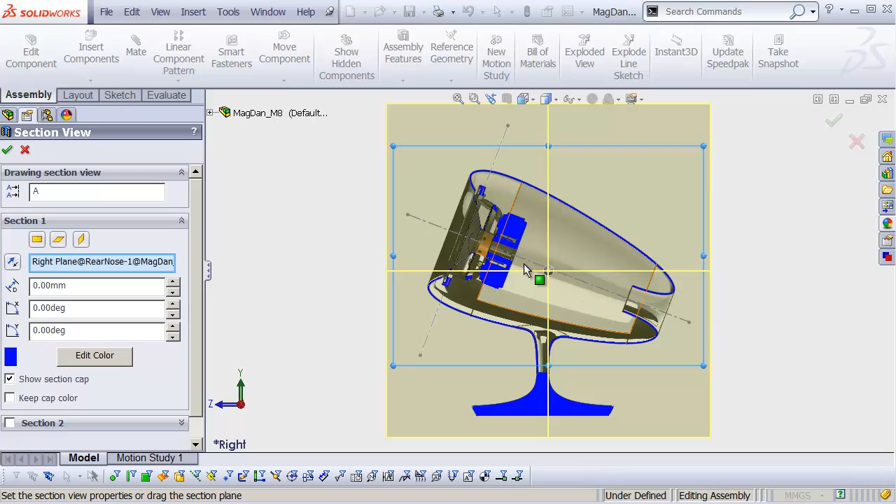Now, to do the inside of this port, first of all, it's going to be helpful to turn on a section view. A section view is effectively going to cut your model in half. It doesn't actually cut anything, it just visually cuts it in half so you can see the inside of the model as you're working, when in reality the part stays exactly as it was. It's still a full model.

Over here in the section properties, you can choose which plane you cut it on. In my case, I'm choosing the right plane. Hit OK. And now I can see what's going on inside this model, which is always embarrassing because then you can see how much we cheated, like making this a big solid chunk, and how this is hollow. How is that made? Nobody knows, we haven't figured that out yet.

But we can also see that there's this horn missing. And to build that, it could be a really repetitive process. We've done this a bunch of times now. And why would we go to the trouble every single time of creating a new part, importing the master model, all that stuff?

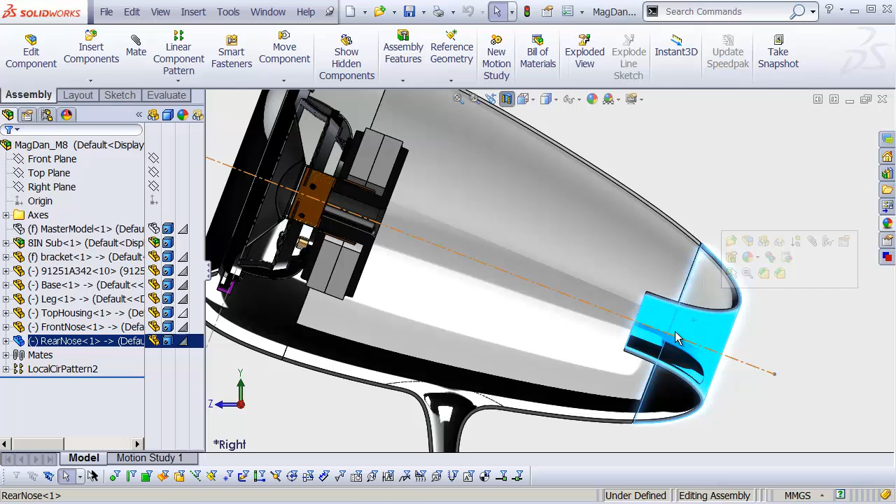Well, here's a quicker way. Now that I have this part that's almost exactly what I want, I'm going to open that in a new window, go to File, Save As. Now, this is a really important point. It's going to warn me, it's going to say, do I want to save as a new name or save as a copy?

If I save as a new name, when I save the copy, it's going to replace the existing part in the assembly with the new one. That's not what I want. I want to save as a copy so that this new piece is not in my assembly at all. Let's click Save as a Copy.

And just so you know, if you don't get that warning box, the other way to do it is right down here. If you check this box for Save as a Copy, that's the safest way to create a new part from an old one. So let's call this our port and hit Save.

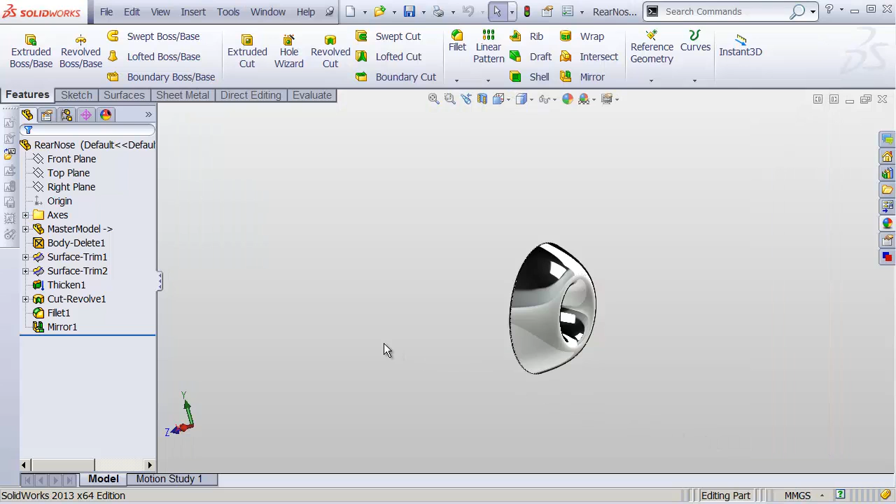Now notice we saved as a copy, so this file is still called rear nose. And if I close this up, we still have our rear nose file in there. All we have to do is go Insert Component, Browse. I'll find that port file that I created, Open. Don't click anywhere, just insert it straight in. And now we have the port in there. It just happens to be right on top of the rear nose, so it's not very visually obvious.

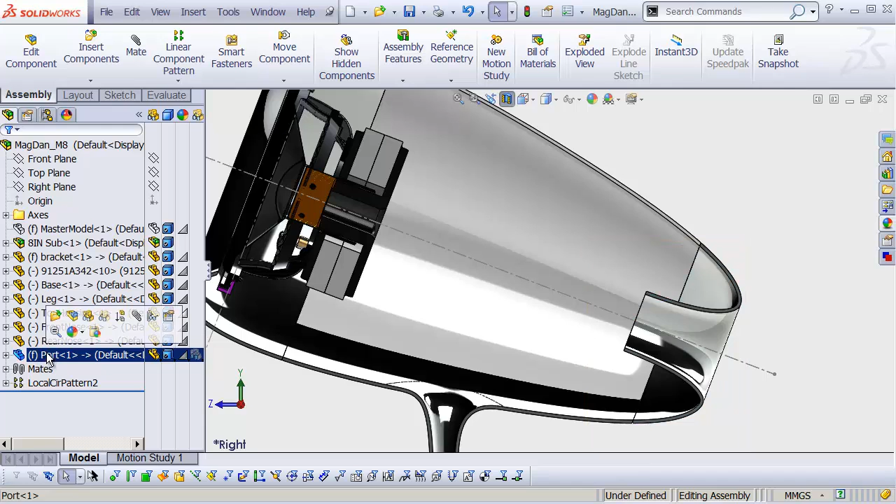Let's open that part up. Let's delete the mirror operation, that's for sure. We'll delete that fillet, we don't need that. We'll delete the cut revolve. We'll even delete the thicken. And that will get us back to this point where we had a surface trim.

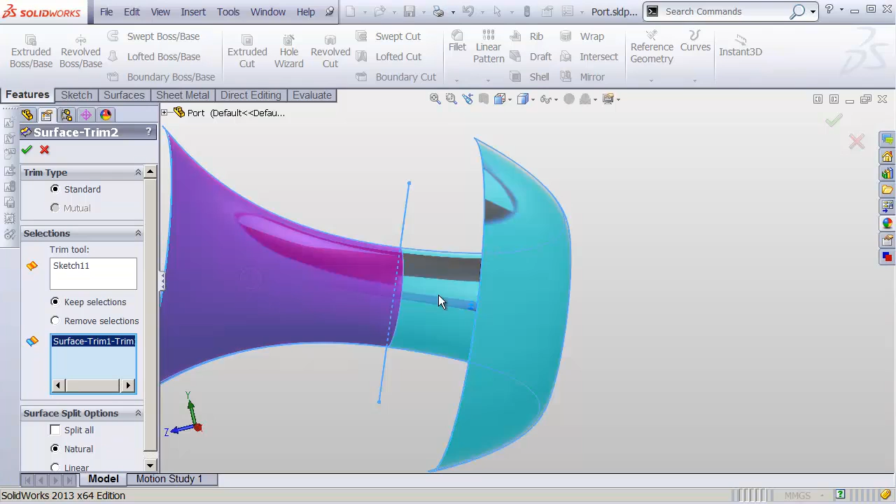Let's edit the surface trim and actually flip it around. Clear selections here. I'm going to keep this side this time and hit OK. Now I can create my port.

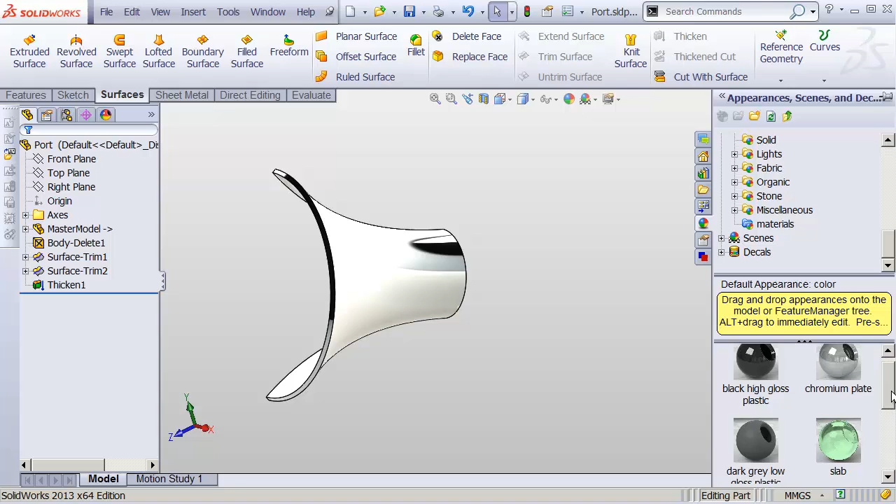Really easy. So I'll go to my Surfaces tab. We'll do a thicken, click this guy. We're going to thicken that by 3 millimeters once again. Close that up. And then finally, let's assign a different material to that. In this case, I have a default gray plastic that I like to use. I'll use this dark gray plastic and assign that to the entire part here.

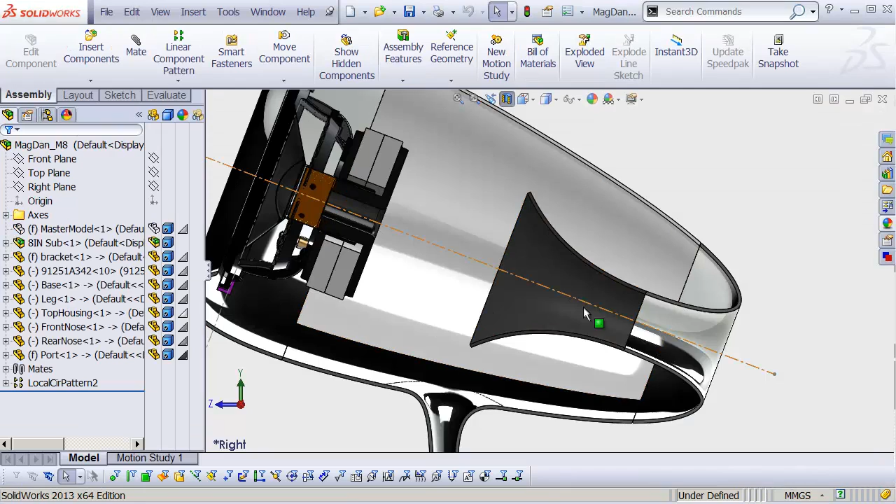Then we'll go to our features, do a mirror. We're going to mirror that across the right plane. In bodies to mirror, we'll choose that. Merge solids. And there we go. There's our finished port. We can close that up. And now we have a port in place, and it mates up perfectly with our rear nose.

So you'll find very often when you're working with a master model, there will be multiple parts that have very similar construction trees, just a little bit different. So what you can do is use that save as a copy trick to get past a lot of that repetitive work of re-importing the master model into a new part, blah blah blah blah blah. So I hope that saves you some time.

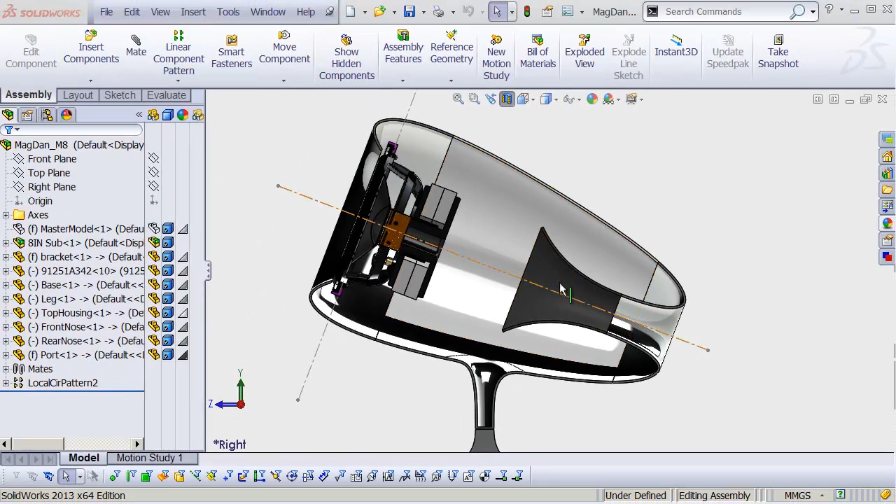And I think with that, we're finished with the exterior of this thing. We've pretty much knocked out the basic design. Now would be the time to send this over to engineering and see how many spit wads they throw at us and how much fun they make of us at the lunch table for our silly mechanical design. We'll find out. All right, stay tuned.